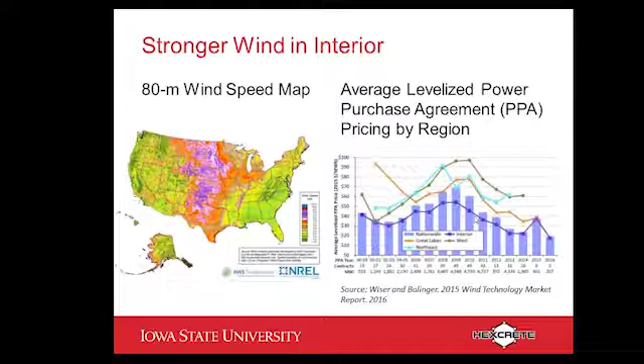The slide on the right shows how the wind power cost has gone down. We have different lines. The blue line is basically in the interior region. You could see the prices have, over time, come down quite a bit. The higher prices are in the areas outside of the interior, where the cost of wind energy is relatively more expensive. But the cost of wind power production has come down pretty significantly. I think right now, if I compare to the cost of wind energy in the 90s, we are only paying 10% of the cost that we paid in the 90s. So it's a big reduction in cost.

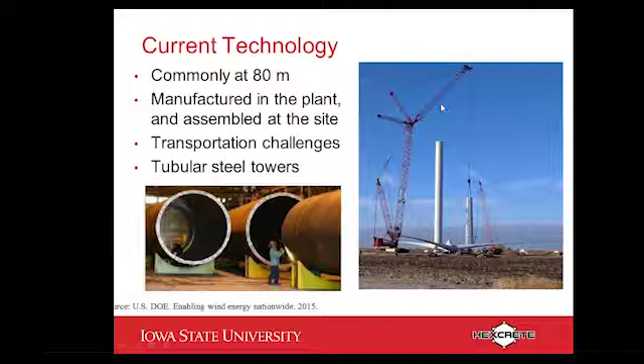So the commonly used, my focus here is on the tower itself. Some of this discussion applies to blades as well, as the questions asked earlier about blade dynamics. So this is what we do: we typically build them at an 80-meter hub height. They are manufactured steel tubes, a very well-established market. But with the 80-meter tall hub heights, we typically would have 3 steel tubular cells stacked on top of each other, and that would help us reach the 80-meter hub height and then produce wind power. So that has been the past.

My interest is going taller. So why do we want to go taller? Because we can increase production by going taller, and we can reduce the cost of wind energy further. The federal government has provided a production tax credit to the wind industry up until now, and that's going to be phased out by the end of 2019. So in order for this market to survive, you still need to reduce the cost of wind power. How can you reduce the cost of wind power? One option is to produce more with the same system; that helps reduce the cost. How do we increase production? We can go taller, get into steadier wind conditions, and that would actually help us reduce the cost of energy.

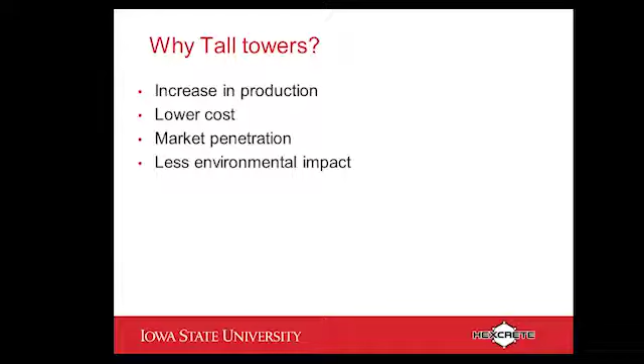If we can design towers and blades with hybrid simulation techniques, by understanding their dynamics we can actually reduce the installation cost of the system. By going taller, we can achieve more market penetration with wind power, and taller towers also provide other benefits which I'm not going to go into.

If you look at the growth over time, in the 90s we built turbines with capacity of about 50 kilowatts. Today we typically build 2 megawatt capacity. Companies doing business in the U.S. are starting to sell 3 megawatt turbines. Offshore has installed up to 6.5 megawatt overseas, and there are designs available to go up to 9 megawatt for just one machine. The benefit is, if you look at how many houses you can power with this one machine, you can see how much we can increase wind power output.

As we continue to grow, I included some cost information here. I think it was 10% of the cost in the 80s and 60% of the cost in 2010. The orange line tells you the cost of wind power over time, so we are pretty much reducing the cost of wind power. As I said, we will not be able to survive unless we bring in new reductions to the cost.

So you can see that over time, we are going taller, getting bigger in terms of rotor diameter, and the nameplate capacity of the machine itself is getting bigger as well. That's where the benefits come in, and that will help us reduce the cost of wind power over time.

In 2010, we were doing 80-meter tall hub height. We're supposed to be doing 100 meters within 3 years or so. We are starting to do 90, 95 now. 125 meters was projected for the future, and then even going up to 150 meters.

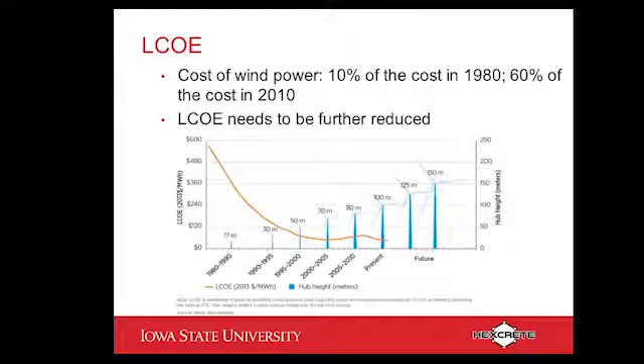Germany still has a pretty good incentive and promotes wind power for a lot of reasons. They've actually gone to, I think, the tallest wind turbine system in the world, which is in Germany, with a height of 176 meters to the hub. That's more than twice what we are building in the US.

If you look at what's happening in the market, the top circle is basically the rotor diameter, slowly creeping up to 110 meters, and I think Siemens now has a rotor that goes to 120 meters for the U.S. market. The bar chart shows nameplate capacity starting at 600, 700 kilowatt, and now we're up to 2+ megawatt. The red line is the tower height, and you can see that's stalled at 80 meters.

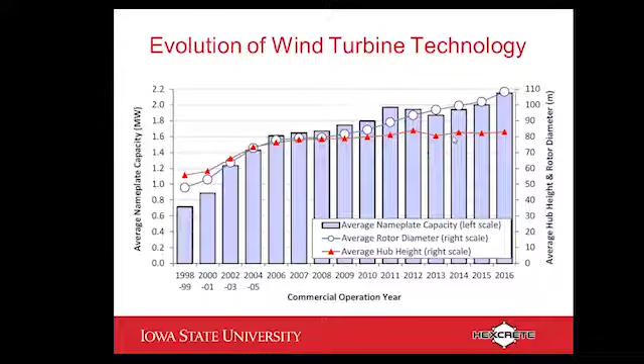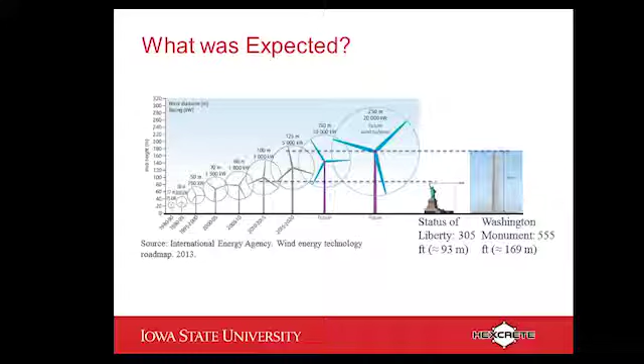So what is stalling the tower height? It's basically the technology that we are using contributing to that effect. Let's take a look at what was projected over time again: by 2020, we are supposed to have 5 megawatt machines with at least a 125-meter rotor diameter, and there are proposals to go up to 150 meters plus in terms of tower height. This is what the market is expecting to happen.

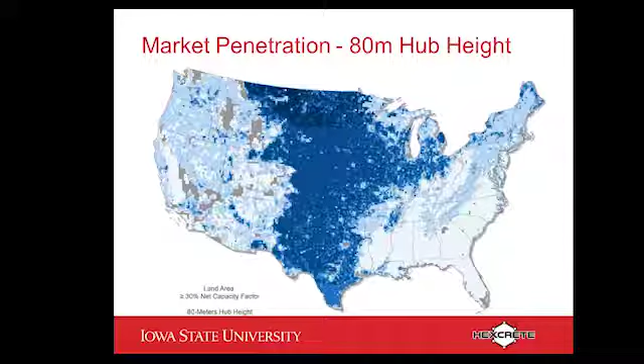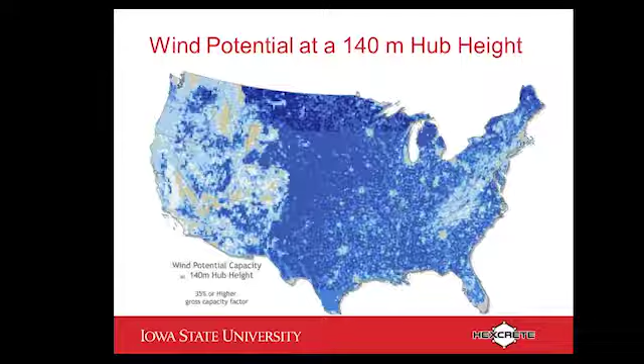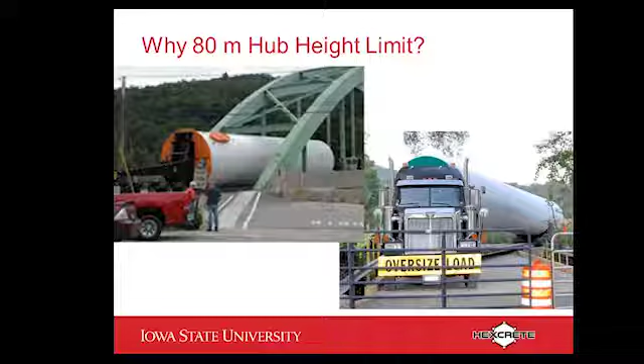So why 80-meter hub height? This is the problem: the technology we came up with is constrained by transportation. If you go taller, the base gets bigger, and then you cannot transport them. The solution is you can segment them and transport them, but if you do that, the cost of construction goes up pretty significantly, and maintenance becomes an issue, so you can't quite do that.

So newer technology is being introduced, and one that I've introduced is known as the Hexcrete tower technology. It's actually based on a concrete concept. This effort was funded by the Department of Energy, with the goal of getting rid of the transportation challenge. The concept we came up with introduces the tower using prefabricated modules of concrete segments of high strength or ultra high strength, so that we will be able to reduce the weight of the system.

What we will be transporting to the site is basically columns and panels, and we will cut them to the length the owner wants to transport. If transportation is an issue, we can cut it shorter. If not, it can be longer pieces. And on site, we will assemble these cells.

These cells are made such a way that the precast fabrication can be done fairly easily without requiring any special formwork. So we use hexagonal shaped columns and flat panels, and then create post-tension cells here, and then stack them and create a Hexcrete tower. So from a design point of view, in construction and transportation, we don't have any challenges. We can go as high as we want.

The DOE asked us to come up with the height for the project, and I ended up recommending that we do 120 meters and 150 meter, 140 meter designs, because if you cross 140 or 150 meters, especially 150 meters, we don't have cranes in the U.S. that can reach up to the top. So we have to stop it at some point.

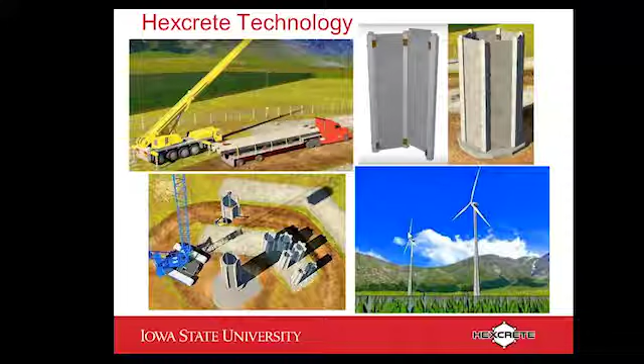Right now, my vision is that we could actually go up to 140 meters and build these systems. We're doing market analysis to show if you go to 140 meters, what will be the impact in the interior, what will be the impact on the southeast. So if anybody is interested in the technology, if you Google, you will see a lot more information.

With the Hexcrete development, the challenge is we don't know how to make this. One concern from the industry is: okay, it's all great, sounds great, you've got pieces coming in, and you're putting them together with some cables. Are they going to stay together during production? Fatigue problem? These are the questions that came up.

They're fair questions because wind turbines actually fail more frequently than maybe bridges fail. We don't hear about them because they typically don't advertise the news. But they do experience failure, and therefore the concern is still there in terms of whether they can actually sustain the load.

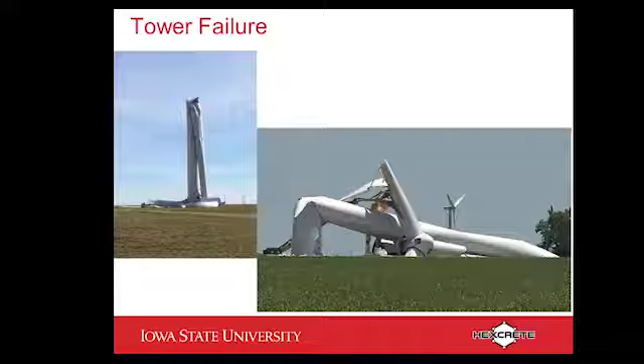If you look at the technological challenges, it could be Hexcrete, it could be something new, but basically the system is going to get more and more complex, and you will see that in the remainder of my presentation.

The loads on towers are not readily available, so companies don't share what loads they typically use for design, and they don't necessarily collect them during actual operation. So everything is based on simulation. It's actually based on a fixed model CFD analysis, which is not very accurate.

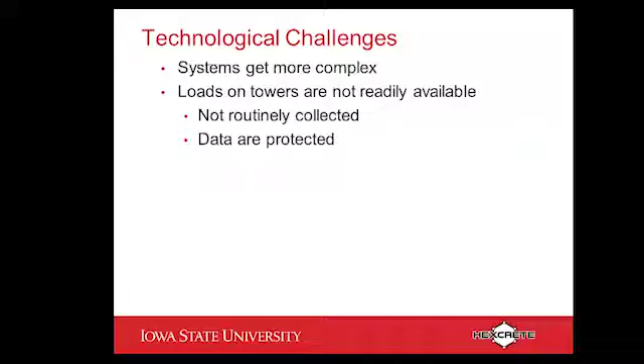The data is protected, and the loads depend on many factors: wind speed, rotor speed, pitch control. The actual machine has become more sophisticated, so that kind of influences what loads the system actually experiences.

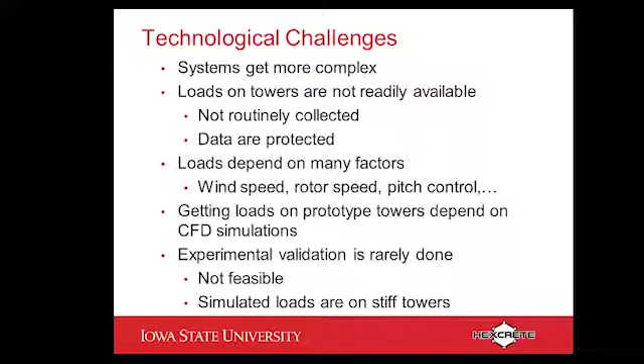As I said, for towers, and the same applies to blades, what they do is build a solid model, so you have a stiff tower, then they push the wind through the towers using CFD and figure out what loads are being simulated. We argue that that's not necessarily an accurate approach. And these companies rarely provide any validation or feasibility study in terms of why the system can work.

With the Hexcrete development, what we did was actually go through a series of exercises to show that we have computer capabilities now.

But these are coupled, fully coupled analyses between the system and the wind surrounding it. What we found was the loads on the towers and blades are actually lower than what companies normally simulate.

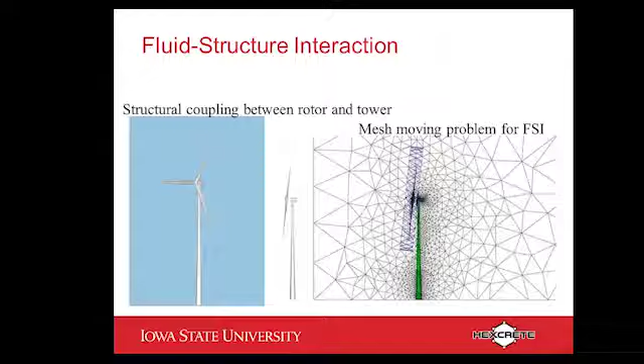So obviously what they're producing is maybe a safer design, but it's a more costly design. What we found was the loads can be reduced because with the fully coupled analysis, you can see... I think this won't work either. So without the fully coupled analysis, you have the same issue, that you have a stiffer system.

This analysis allowed us to look at not only the wind effects on the towers and the rotor, but after that wind energy is taken away, it creates turbulence that affects the tower behind it, and what would be the impact of that turbulence on the adjacent system.

For the Hexcrete development, I've been fortunate enough to find funding to do different components. First we actually did component tests to show the connections between columns and panels can work. We looked at different types of connections. Some of you may not be interested, but the point I want to make is that we looked at different ways of connecting it so we can give multiple solutions.

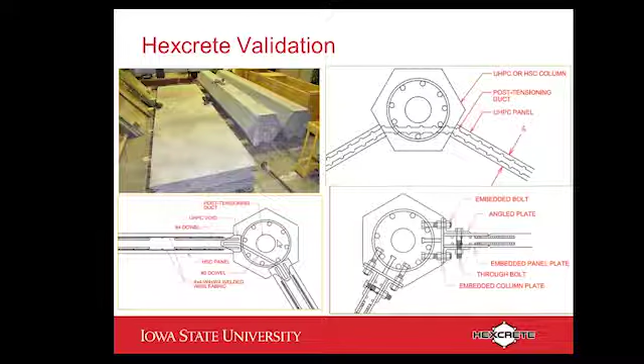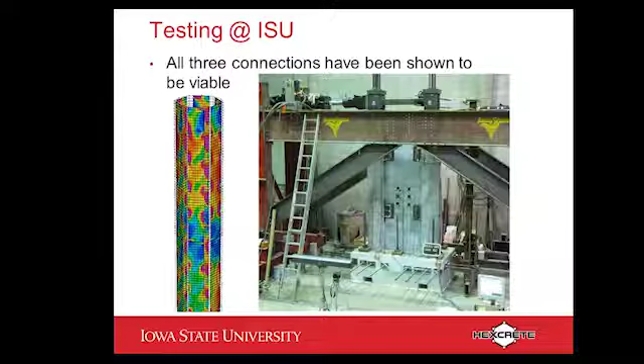Once we connected it, we identified in the whole tower which panel is going to be the most loaded panel. Depending on the height, because we taper the tower, we apply the load to show the connection can survive. It's a very brute force approach where you only take one set of loads and apply. There are situations like that where hybrid simulation can be a very powerful tool if you want to use it.

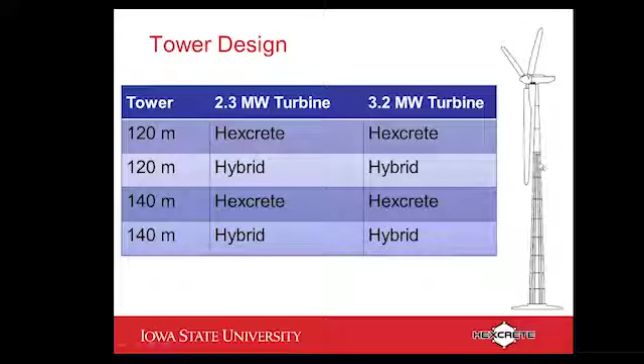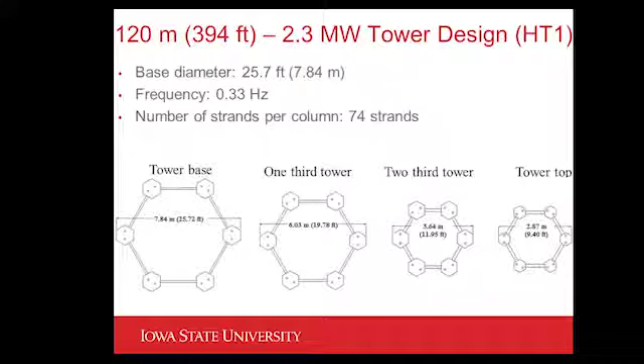When we received the DOE funding, we had industry partners and we were able to design different systems. In this case, we identified a segment up here which we thought was the most critical, and then we were able to do the actual design. This work was done in collaboration with Siemens using one of the turbines, the 2.3 megawatt. We decided to do a test to show the whole thing can actually work.

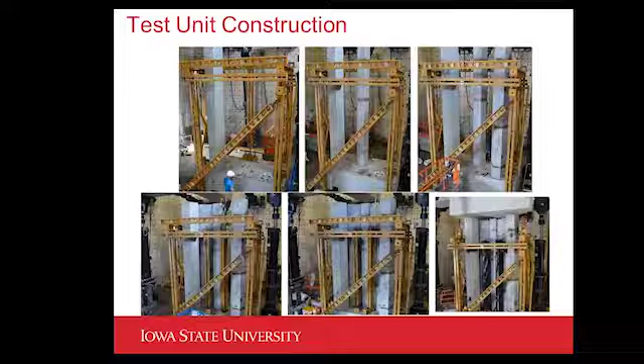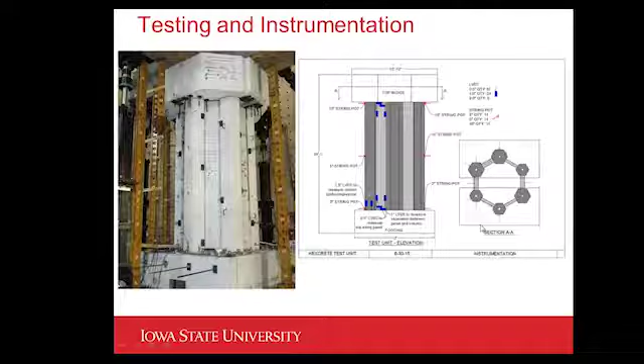Here's the construction right here at the MAST Lab. This is the testing, the instrumentation. Since we didn't have the hybrid simulation capabilities, we had to come up with how we would load the system. We chose multiple directions of load and came up with somewhat of a complex load protocol.

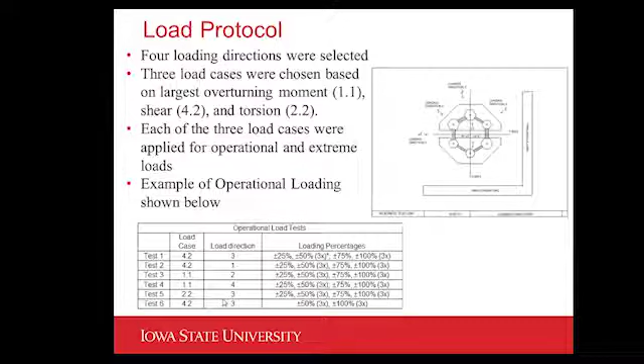You can see at the bottom of the table here that we came up with different load combinations, but we were guessing in terms of loading the system more effectively. I wish we had a fluid structure interaction model that provided information so that we could apply the load more like what the system will actually experience.

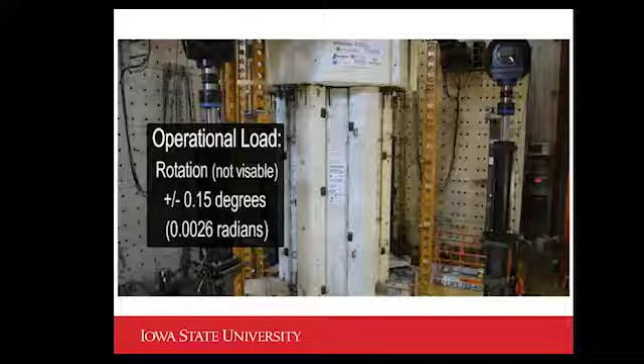Here's a test of the system, hopefully it will work. This test was done here in the lab. Basically, we came up with the load protocol to make sure that we are covering the envelope load rather than doing a hybrid simulation type of testing.

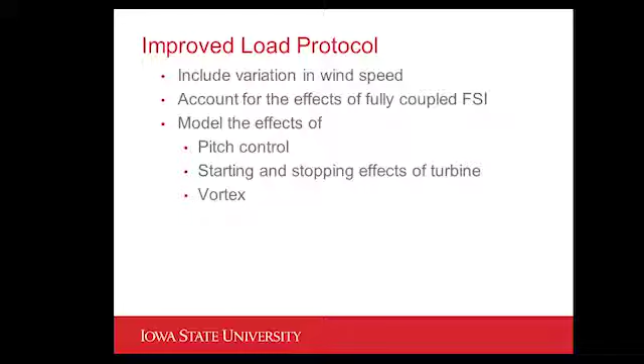The improvement I could think back on in terms of what I would have done differently is that I could have included variation in wind speed if I could. I think hybrid simulation can do that, accounting for the effects of fully coupled fluid structure interaction, so the loads on the tower would be more realistic. We could also look at modeling the effects of pitch control and starting and stopping the turbine, which puts additional load on the system, and even vortex effects if needed.

So why would we do more tests? If the industry is doing pretty good, do we really need to do more tests? I have a Hexcrete technology that has been tested, and you'll find there are more and more new technologies coming along. The offshore market is starting to grow in the U.S. We now have the first offshore energy production installed in the U.S., and there's a projection that we will have about 25% of our wind power actually being offshore wind power production.

I'll give you some ideas there. Tower vibration is going to continue to increase, so that needs to be accounted for in the actual testing. The cost reduction I mentioned is possible, so by designing towers with a longer lifespan we can also help reduce the cost. I think we can help establish realistic loads on various wind turbine tower technologies and confirm feasibility of tall towers.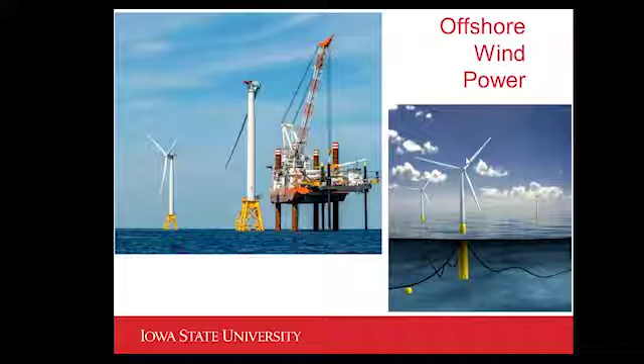Offshore, as I said, this is the Block Island wind power production, and our goal eventually is to go towards floating wind turbines for the offshore market. The offshore is going to have floating systems, and that's going to require pretty significant testing to make sure these systems can accommodate large loads.

When you do tower designs, we typically keep away from what's known as the 1P, 3P frequencies, so that the passing blade frequencies cannot resonate the tower frequencies. We keep them in three different areas: one is known as soft, soft-stiff, and stiff. Most towers are designed to be soft-stiff. Including the Hexcrete, we keep them between the 1P and 3P so that we can have a relatively stiffer system. There are companies pushing for what's known as a soft system so they could cut down the amount of material they use, but the tower will be very flexible and scary.

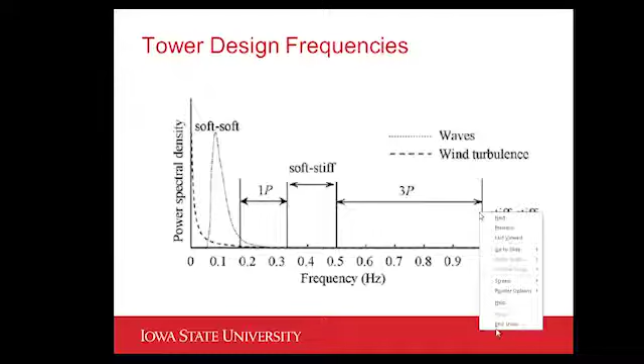So I don't think this video will work either. These are soft towers—a couple have been installed, and you will actually see them. Unfortunately, the video is not working, but these towers basically wiggle when the wind blows, but when the production is not there. How do you make sure this system can survive? In fact, they put up a few towers, and one has already crashed, so there are concerns.

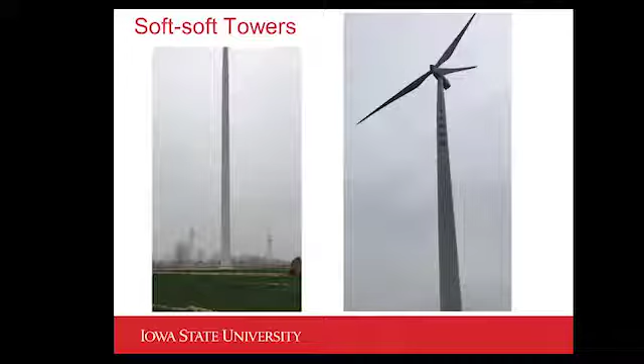So these are the type of system where we can actually use testing more effectively. With my time getting closer, the question is, are we really going to have a lot of wind power production coming up so that this is a worthwhile investment?

If you look at this graph, you can see the different color graphs. Back in 2000, this light blue or cyan color is what was projected for wind power production worldwide. Then they changed the graph and said, no, we're going to do better than that. Then they changed it to purple, then to blue. So the growth in wind power is going to be there whether you like it or not. You can be a strong supporter or oppose it, but I'm saying this is where the market is going. It is going to grow, and the U.S. projection is that we're going to quadruple installed capacity from where we are.

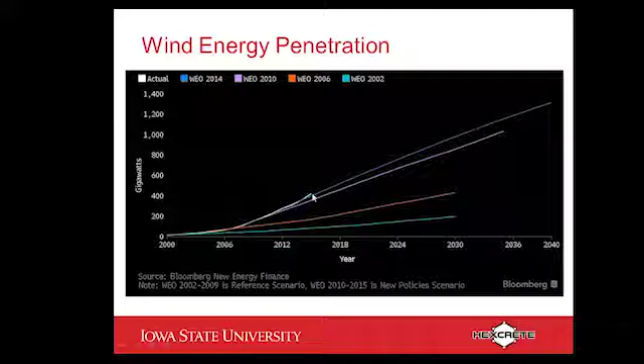The white line is basically what we are doing over time. You can see we are staying on the curve, which is being adjusted based on what the market is doing. This is projected wind power for the U.S. Typically each year, we actually install more wind energy than any other source of electricity in the U.S. now. The yellow band tells you how much installation is expected to take place over time.

Our goal is by 2050 to produce 35% of our electricity from wind. That's huge. I think Khalid mentioned 28% for Denmark—in fact their numbers have gone up to 48% today. Iowa, last year, produced 37% of our electricity from wind. Minnesota is probably at 13, 14% at most. Nationally, we are doing 6%. So from 6%, our goal is to go to 35%.

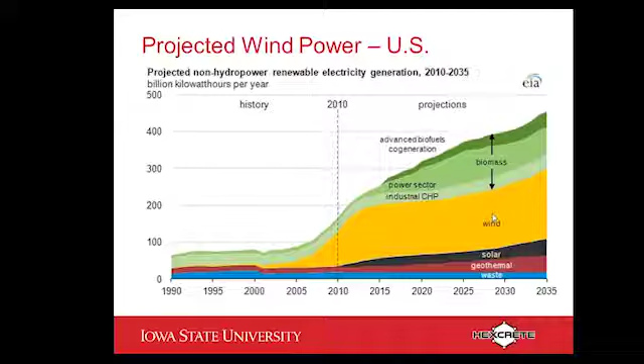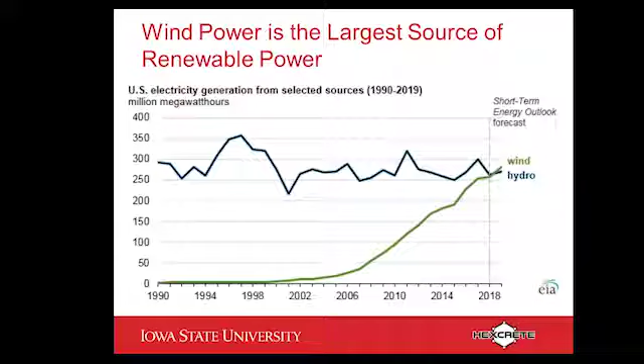The growth will take place because that's where the significant investment is going. Another thing to note is that wind power is today the largest source of renewable power in the U.S. It used to be hydropower—up until recently, wind power has taken over in terms of installed capacity. In fact, the hydropower guys are getting together to figure out how to come back as the number one source, because wind can be installed in many places easily.

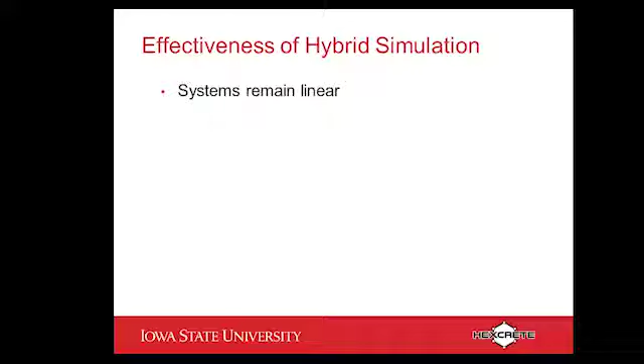So why is hybrid simulation useful or effective? If you can bring hybrid simulation to this particular field, you can actually make an impact because the system, in this case, remains elastic. So doing the simulation is relatively easier than some of the earthquake problems we dealt with. Because the system remains elastic, that helps you—the wind load can be predicted with high accuracy compared to earthquake load, for example.

So we will have more information. In fact, we have a lot of information about wind, especially if you're going to put up a wind farm at a given location. We can collect data pretty quickly, and there's historical information available. Loads on tower segments will be more realistic, which will improve the design and its dynamics compared to what we do today, providing more accurate fatigue loads.

One of the big unknowns in the wind world is fatigue loads. If you talk to one company, they'll say they expect you to design for a 5 million cycle fatigue load. Another company will say 10 million cycles. There's no consensus—it's a big, wide range. That's something we can help them establish.

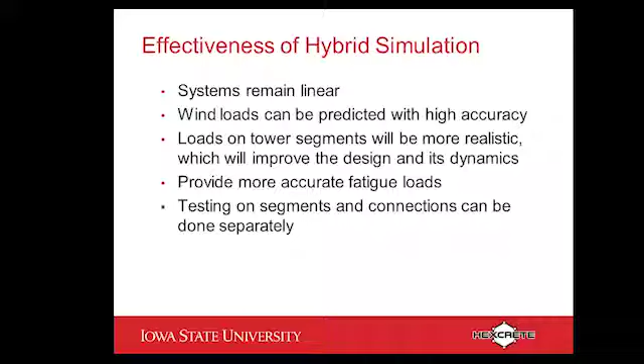Testing on segments and connections can be done separately with the hybrid technology, and we can certainly promote more cost-effective and safe design of tall wind turbine towers in the U.S. and around the world.

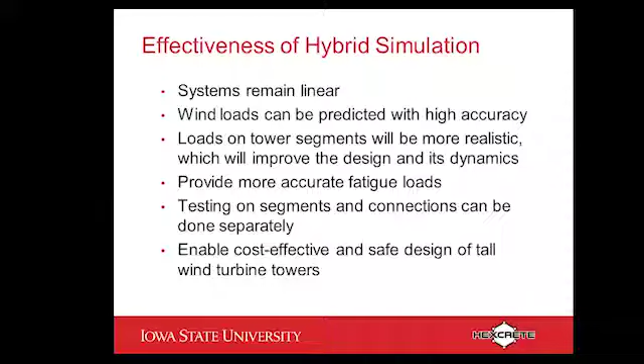That's pretty much my last slide, just to share with you where this is going and what the potential is. I think hybrid simulation can be very effective in helping an industry that doesn't know it needs this or could even benefit. And this industry is a very close network—it's hard to break in. It takes years of time to do it, but that's what we're all good at doing, right?